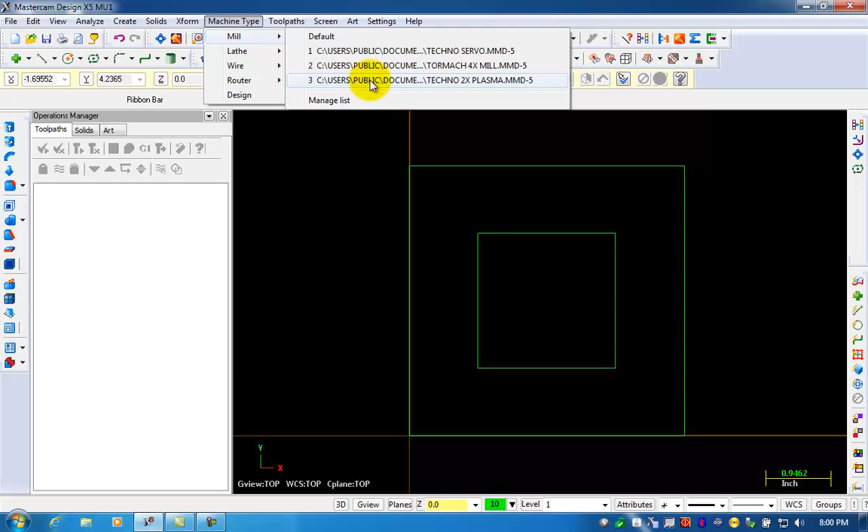So the first step is to activate the Techno 2x plasma machine definition. If that's not on your list, you can select Manage List and select the Techno 2x plasma from the left side here. If I have removed that, you'll see it's on the left side here.

If you don't have the Techno 2x plasma, you can get that from our download site by going to patongroup.com. That's PATONGROUP.com, going to the download section and downloading the post-processor installer for whatever MasterCAM version you're using. I'm using X5 at the moment.

Okay, so once I've activated the machine definition, the toolpath I'm going to use in both cases is a contour toolpath. So I'm going to go to Toolpaths, Contour, and I need to cut out the center before I cut out the outside. So I'm going to select the inside contour.

Now the direction that you chain determines which side of the line the plasma is going to cut on. For an inside contour, I want to chain counterclockwise. This will be my starting point. So I'll select here, and you'll notice that the arrow is indicating the chain is going counterclockwise. We'll select OK.

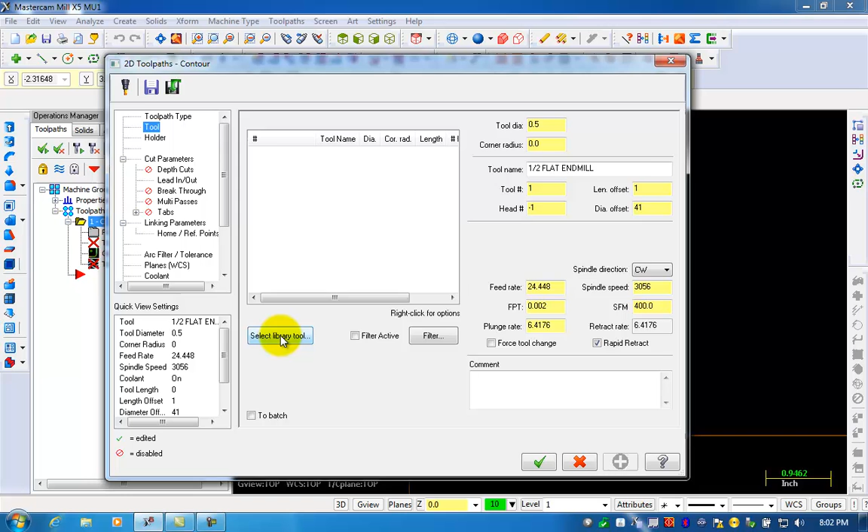For the tool, I'm going to select the library tool, and the library I'm going to use is my plasma tools. Turn off the filter, and from my cut test I'll know what size kerf I'm working with. I'm going to assume that I'm working with a 16th inch kerf.

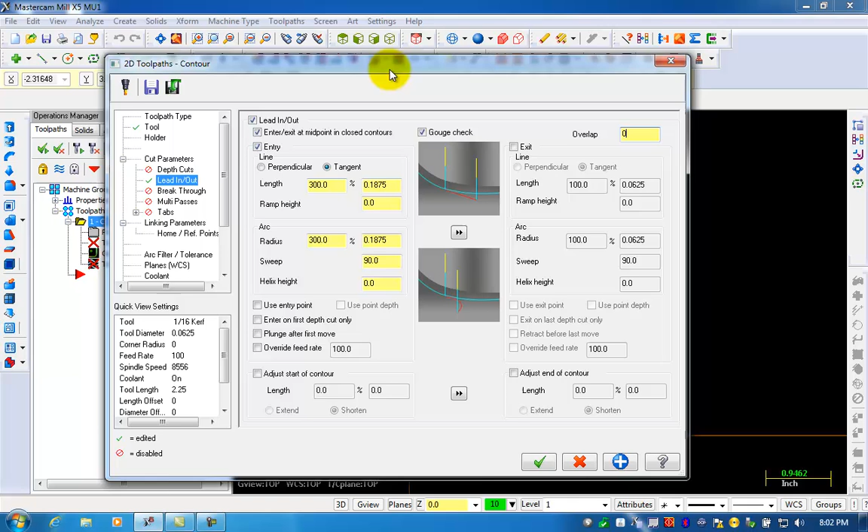I'm going to go to my lead in and lead out, and I'll set my length to 300% and my radius to 300%. I want an entry move but no exit move, and I want an overlap of 0. What this means is I want it to penetrate and do the splattering in the part of material that I'm going to discard, then trace in towards the contour, trace around the contour, and then stop without exiting. It has to stop without exiting because that piece of material may actually fall off.

We'll select OK, and there's my move. And here's where the start of my cut is going to be. The plasma will penetrate here, follow the lead-in line, work its way around, stop, and then the torch will go out here and reposition.

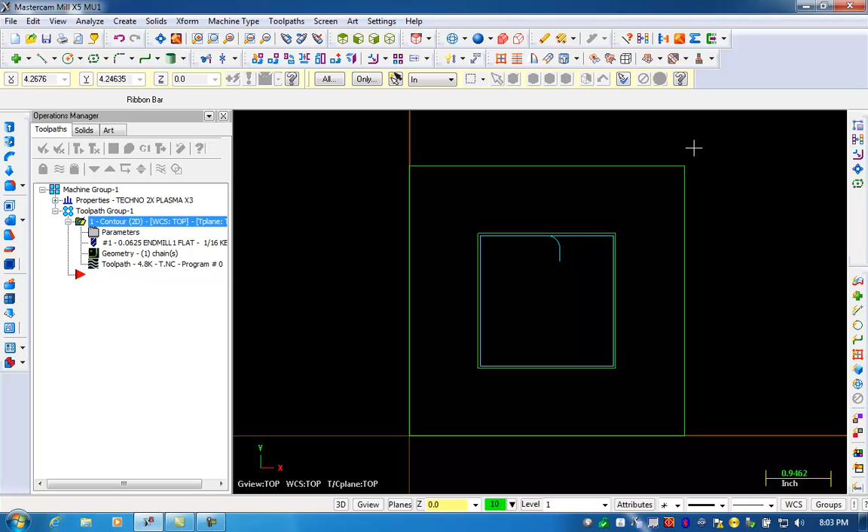For the next cut, I want to go around the outside. Outside contours are always chained clockwise. So I'll select my contour path again, select my chain to start here. This makes my arrow point in the clockwise direction. Select OK.

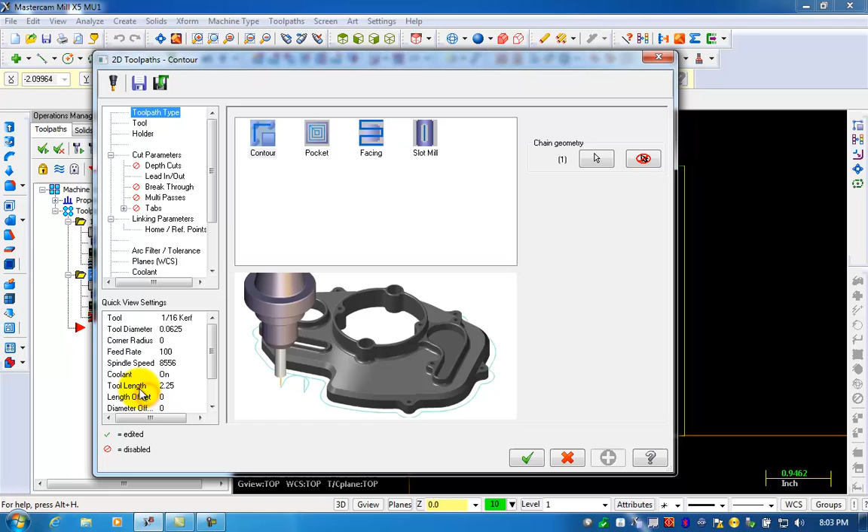For the tool, I'm going to use my 16th inch kerf still. For my lead in and lead out, 300% for length, 300% for radius, 0 for the overlap. Select OK. And there's the start point for that cut. The lead in, tracing around, and then stopping right there.

Okay, at this point this is ready to post. So I'll come over here to the operations manager, and I'll select the machine group. That gives me a green check mark on both toolpaths. Then I click on the G1 button, which runs the post processor. We'll select OK. And here's my posted code.

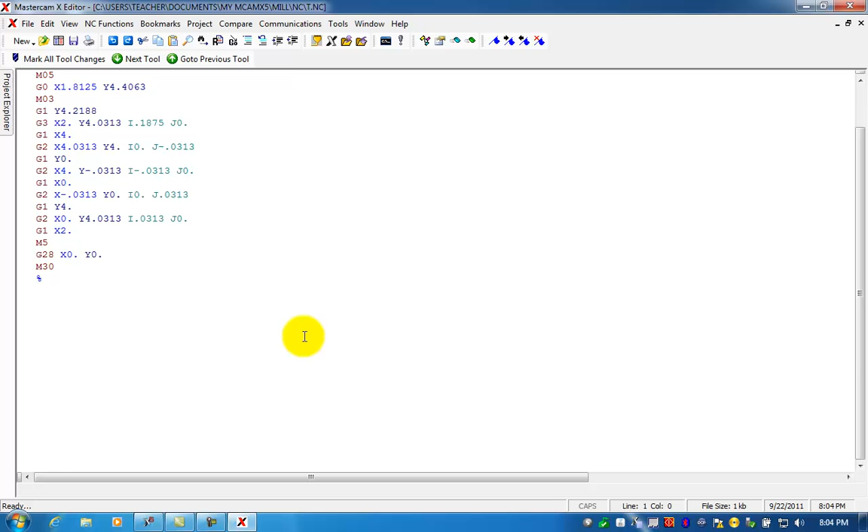At this point, this is ready to run. So I'll select File and Save, or Save As, and then put this on, for example, my flash drive so I can bring it over to the plasma machine.

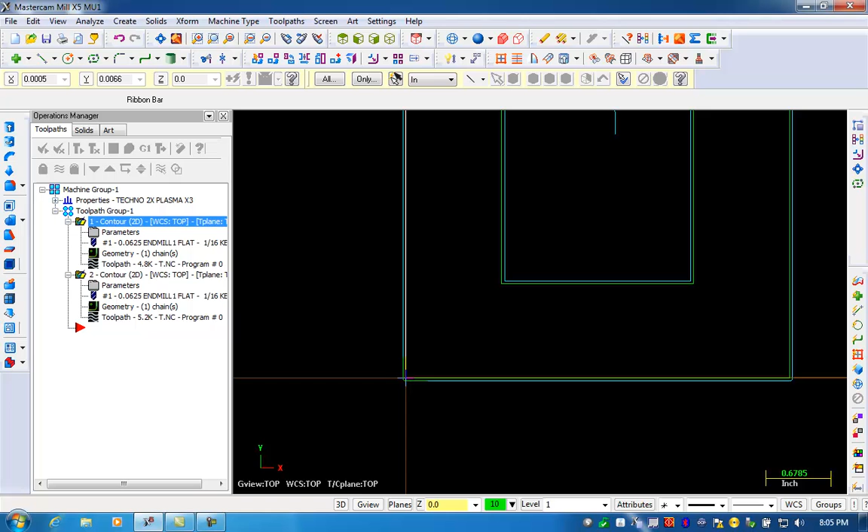Okay, a couple of notes here. I'm zooming out a little bit. I have the axis turned on so I know where my 0 point is. When I go to position this on the machine, this is the XY 0 point, so the lower left corner of the box that I want to cut out is going to be my 0 point on the machine. So that's where I'm going to set my X and Y 0 at.

If you don't have those lines on the screen, you can hit F9 to turn them on and off. And that concludes how to do a toolpath for the plasma using MasterCAM.